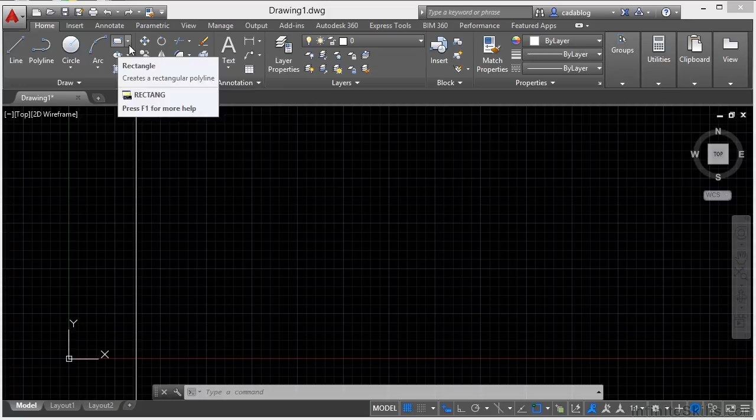Each tab has a panel containing the commands and tools you'll use. Panels, like tabs, are grouped by similar commands. For example, the Draw panel in the Home tab has commands to draw lines, polylines, arcs, circles, rectangles, center ellipses, and other items. The Annotation panel lets you create dimensions, leaders, tables, and text.

To switch between tabs, you click the tab you want to work in. So click Insert, then click on the Insert button to use the Insert command.

If you aren't sure which command icon is for which command, just hover over it. This pops up a balloon called a tooltip, and if you hold it a bit longer, an expanded tooltip shows up with more information about that command, tool, or setting. These are very handy, especially when you're first learning AutoCAD. Tooltips give you the name of the command and a short description. If you want to learn more, there's often a link inside the tooltip to get you to the help screen.

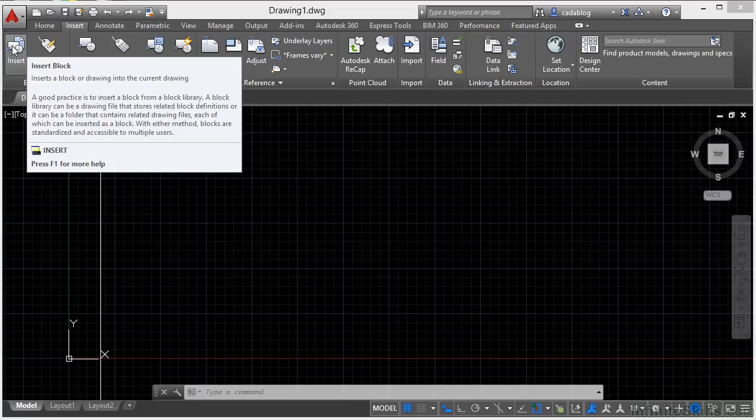Or as you hover over any tool, press F1 to bring up the help system for that specific command. Some panels collapse, shrinking to give you more room on your screen. If I go to the Home tab, you can see several panels shrunk down, like groups, utilities, clipboard, and view.

As I hover over them, they pop out and expand, showing exactly what's in that panel. To activate a command, you simply go to the tab and then the panel you want, hover over the icon, and left-click on it.

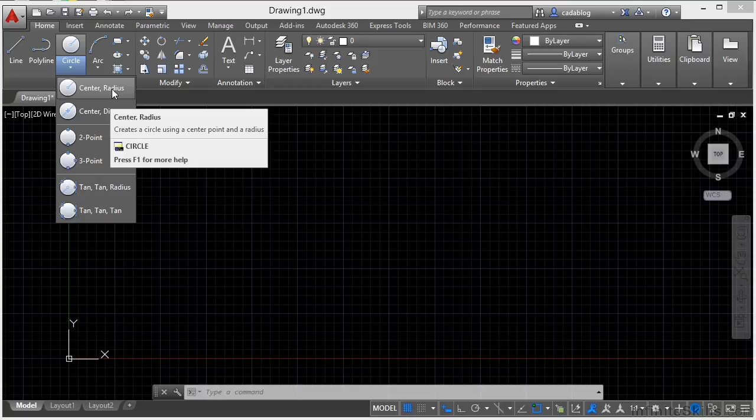Some commands, like the circle command, have fly-out icons. You can tell because there's a little arrow. Arc has one, and so do the commands for rectangle, ellipse, and hatching. To access the flyouts, you click the arrow and another window pops up showing other options for that command. There are many different ways to draw a circle, and these flyout commands give you the ability to draw a circle in that way.

Same way with an arc, or with a rectangle, or a polygon. The rectangle and polygon aren't flyouts for that specific command, but flyouts for similar commands you might want to use. This is done because you don't always need the polygon command, but you want to be able to use it and get to it quickly this way, and it saves room.

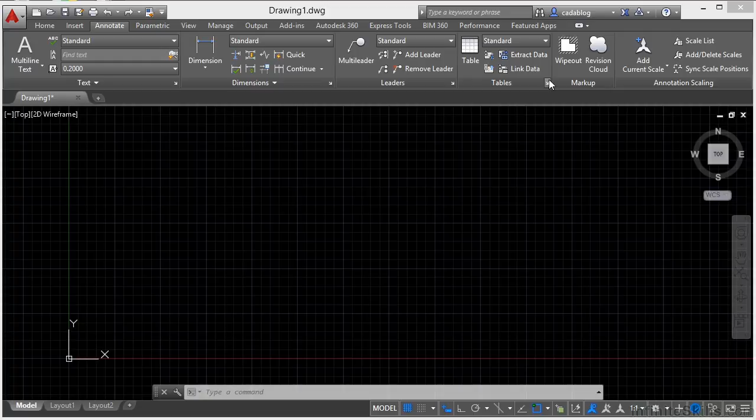Some panels have style managers. For example, if I go to the Annotate tab and look at text, dimensions, or leaders, you'll see a little diagonal arrow in the bottom right-hand corner. This is the style manager for your text, for your dimensions, for your leaders, for your tables. If I left-click on that, it will open up the text style manager.

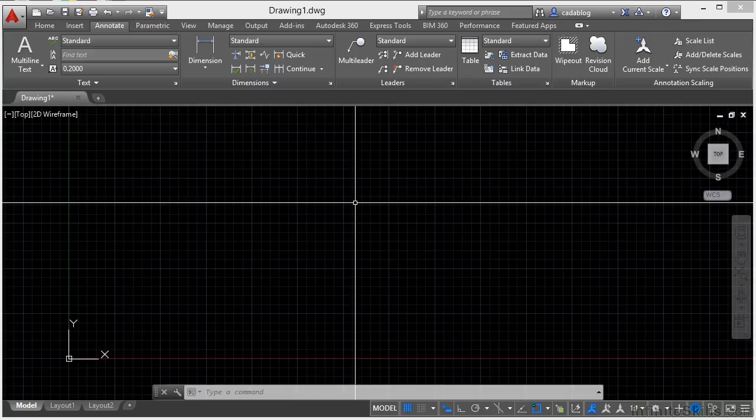There's another type of tab that shows up in the ribbon from time to time, called contextual tabs. These tabs aren't accessible at the moment, but show up when a certain command is activated. They contain tools you won't need during normal working conditions, but the contextual tabs have tools you'll need in special cases.

One example is the Hatch tool. If I go to the Home tab and want to create a hatch, I click on the Hatch command, and this brings up the contextual tab for hatches. It's highlighted in blue, telling you this is where it is. Now I can go to one of the other tabs if I want, and it remains up here until I cancel out the command. This gives me all the tools, settings, and options I need to create a hatch.

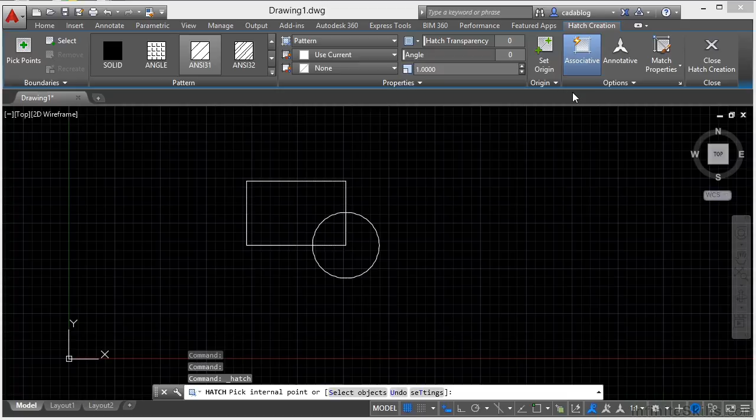I can also manipulate the hatch as it's already started, changing some things if I'd like, or going on to create a new one. Once you finish your command, that contextual tab will go away. As we come across these contextual ribbon tabs throughout the video, I'll make sure to point them out to you.